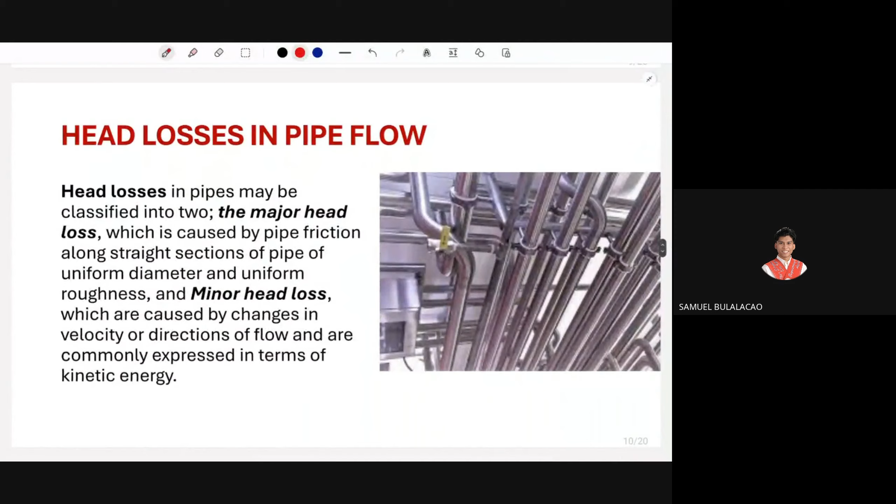Let's proceed with the head losses in pipe flow. During our discussion of hydrodynamics and Bernoulli's equation, we already discussed head losses, which is the energy at point 1 minus the head losses equivalent to the energy at point 2.

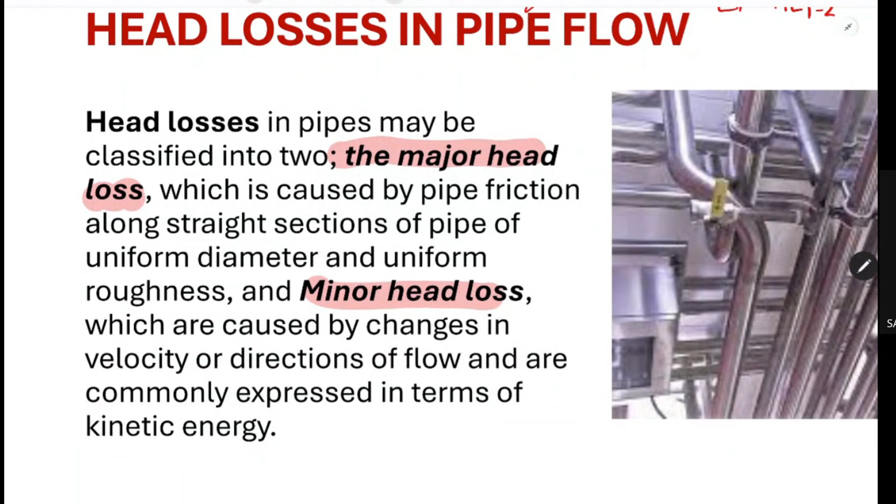So what exactly are these head losses? They're connected to what we'll discuss now. Head losses are classified into two categories: the major head loss and the minor head loss. The major head loss is the head loss caused by pipe friction along straight sections of pipe of uniform diameter and uniform roughness, basically our typical pipes that are round and straight.

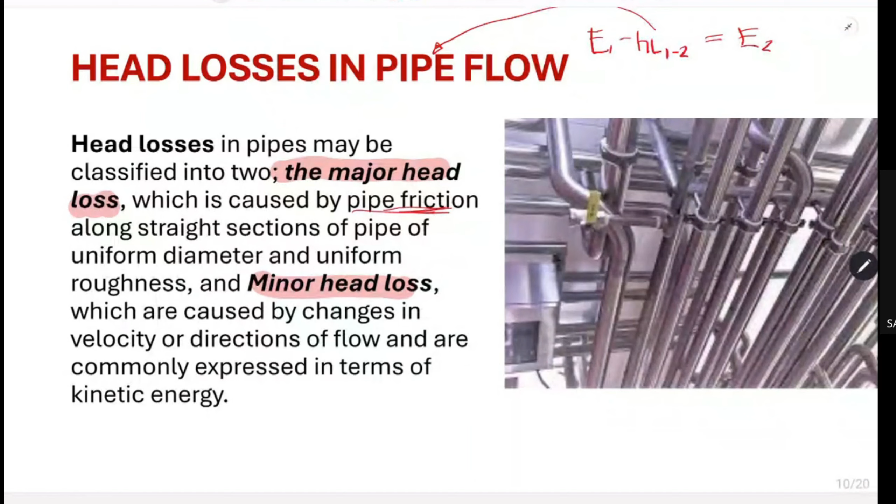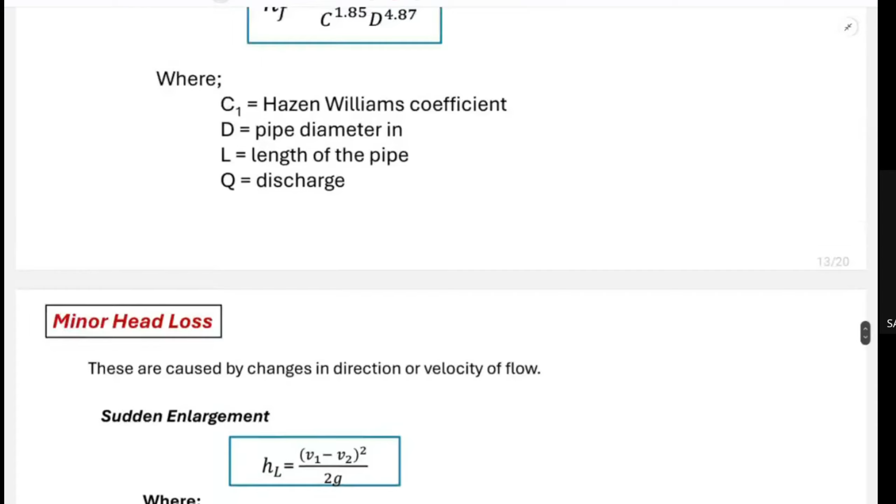First, we have the major head losses. We'll list them - major and minor. This is the pipe friction equation for major head loss. We have a total of 3 major head loss formulas that you need to memorize and familiarize yourselves with, since you can use these in everything. Don't forget them - these formulas are very important.

First, we have the Darcy-Weisbach formula. We won't introduce who made this formula or equation - we'll just acknowledge their greatness by using this equation. This is the first major head loss equation for pipe frictions. So the main equation is this.

The head loss is equivalent to the friction factor F times the length of the pipe in meters or feet, times the average or mean velocity in meters per second or English units, over the diameter of the pipe, multiplied by 2 times G. You can memorize this main equation for Darcy-Weisbach.

In this first formula, we have symbols 1, 2, 3, 4, and 5 that need to be familiarized: friction factor, length, velocity, diameter, and the gravitational acceleration, which is constant at 9.81 meters per second squared.

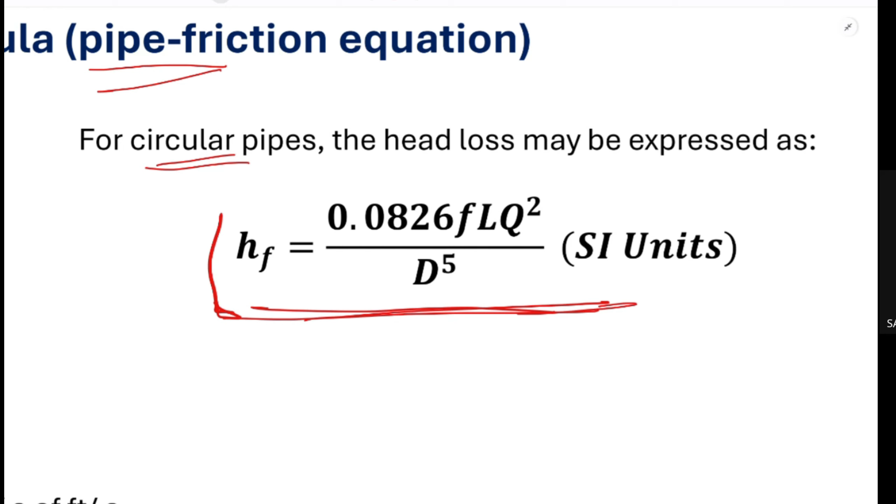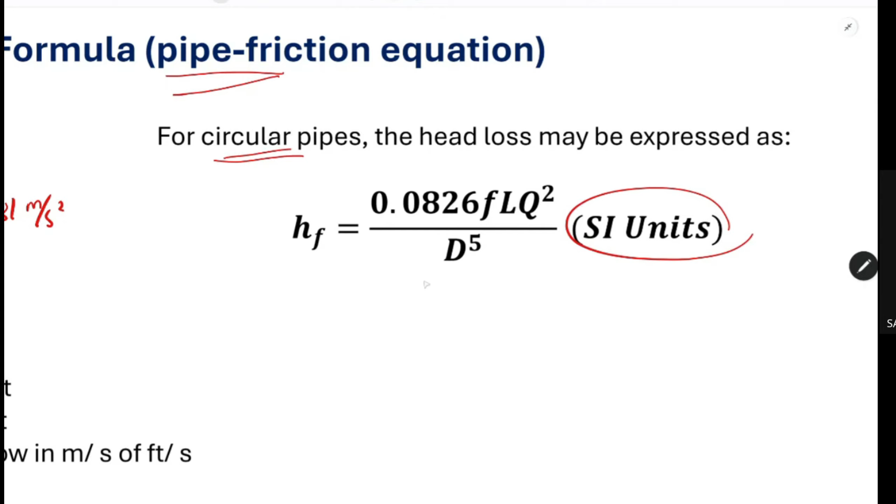We have HF equivalent to 0.0826 times the friction factor times L times the discharge squared, over the diameter raised to 5. You need to memorize this - put it in your notes or index card, or have it printed so you don't forget. The unit for this is SI units only for this equation, and most of our problems mostly use SI units.

Next, we have the Manning formula, which will be your companion for these formulas when it comes to correlations in board exams. The second major head loss is the Manning formula. This formula is best known for open channel formulas and is commonly used in pipes as well, for analyzing pipes.

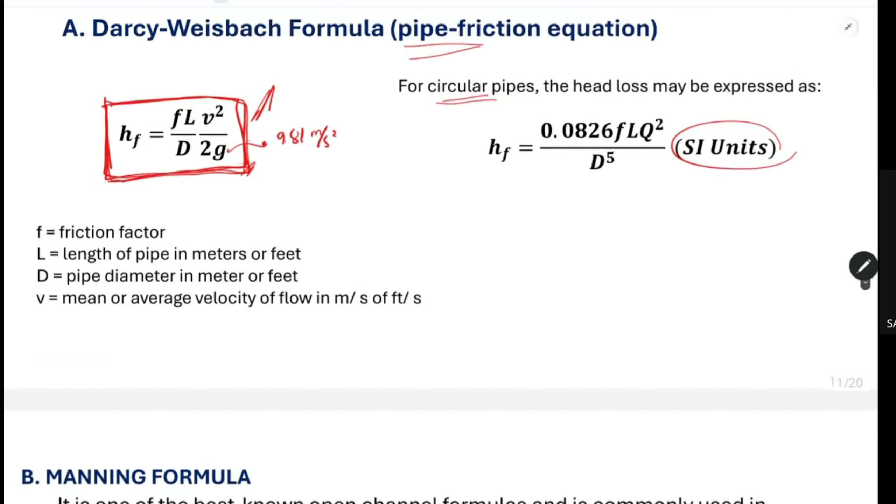For the formula, we have velocity equal to 1 over n, where n is the Manning's or roughness coefficient, which is always given. We have R, the hydraulic radius, raised to 2/3, and the slope of the energy grade line raised to 1/2, which is S. For now, just write this down so your formulas are ready.

For circular pipes, we have two versions. We have 6.35 n squared L V squared, over D raised to 4/3. And we have 10.29 n squared L times Q squared, over D raised to 16 over 3. Basically these are almost the same - the second one just expanded and converted V into Q.

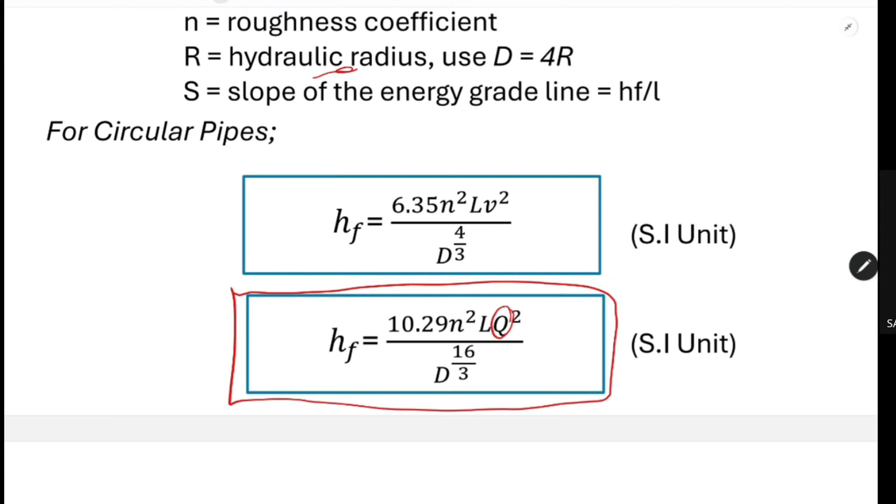Lastly, we have the Hazen-Williams formula. It is widely used in waterworks industry. These three formulas are always used when it comes to waterworks, piping systems, etc.

We have the formula for circular pipes: 10.67 times L times the discharge over the Hazen-Williams coefficient C, raised to 1.85, times D raised to 4.87. The exponents and multipliers can be confusing.

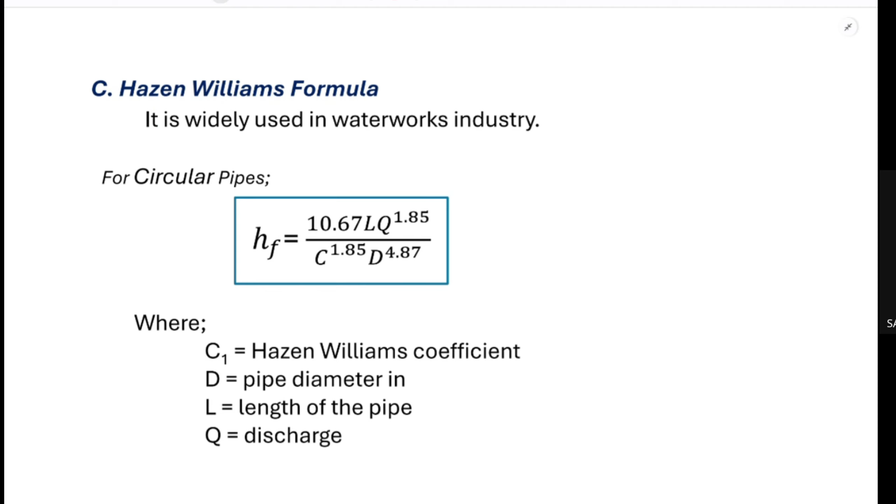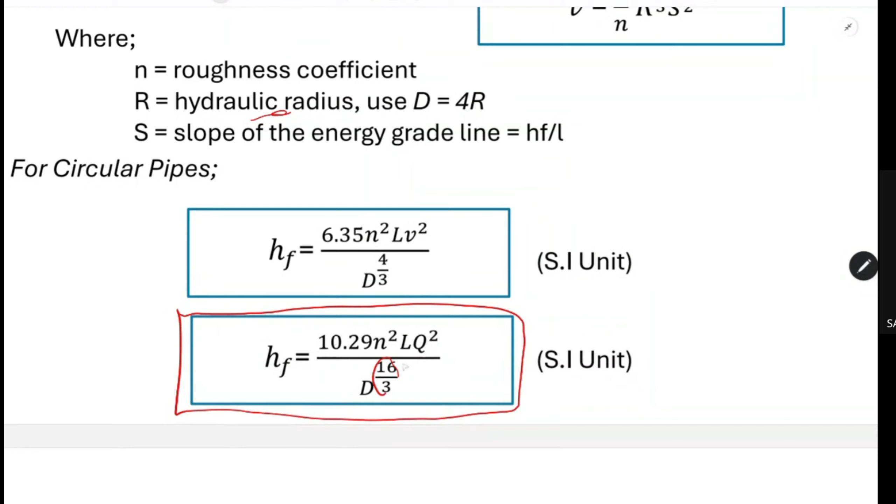So we have 0.0826 FLQ squared over D raised to 5 for Darcy-Weisbach. We have Manning's formula: 10.29 n squared LQ squared over D raised to 16 over 3. And lastly, Hazen-Williams: 10.67 LQ to the 1.85, C to the 1.85, D to the 4.87. These are similar to each other.

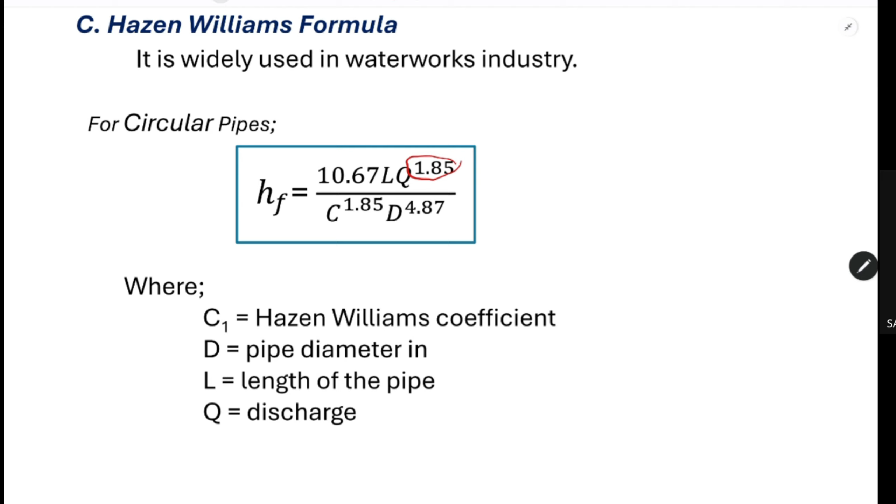Let's move on, there's also minor head loss. These are caused by changes in direction or in velocity of flow. We have sudden enlargement - when the area is small and suddenly becomes large, the velocity changes, and that change in velocity has an effect on head losses, which falls under minor head losses.

For sudden enlargement, we have HL equals V1 minus V2 - V1 being before and V2 being after - raised to 2, over 2G.

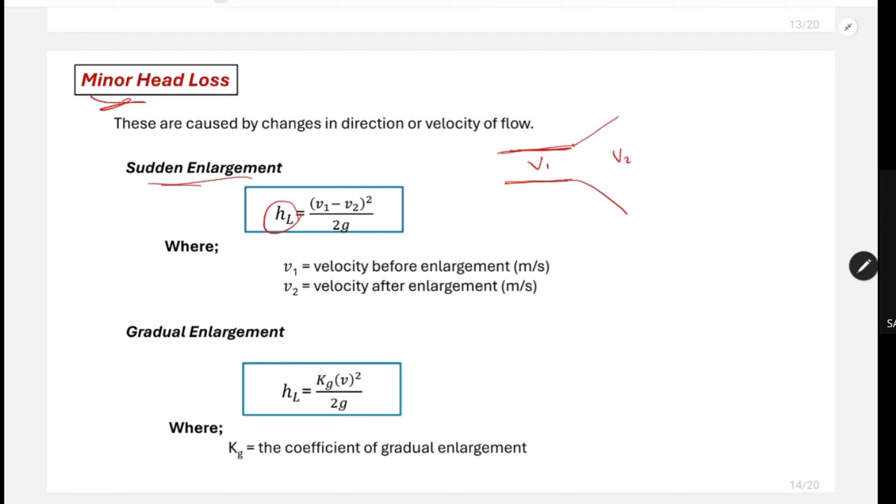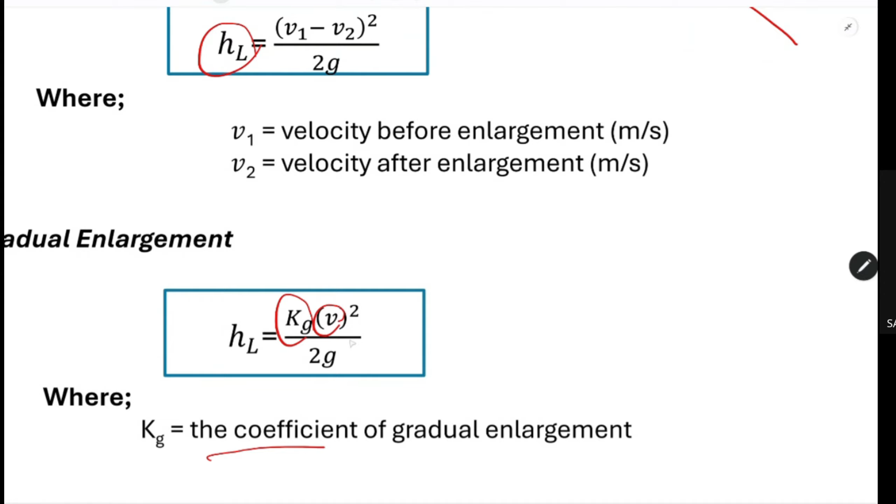For gradual enlargement, the equation becomes Kg, the coefficient for gradual enlargement, times the velocity squared over 2G.

Next, we have sudden contraction. For sudden contraction, we have HL equals Kc, which is the coefficient. What changes here is just the coefficient - Kg for gradual, and Kc for contraction.

Let's try solving problem number 1. Let's solve this one first.

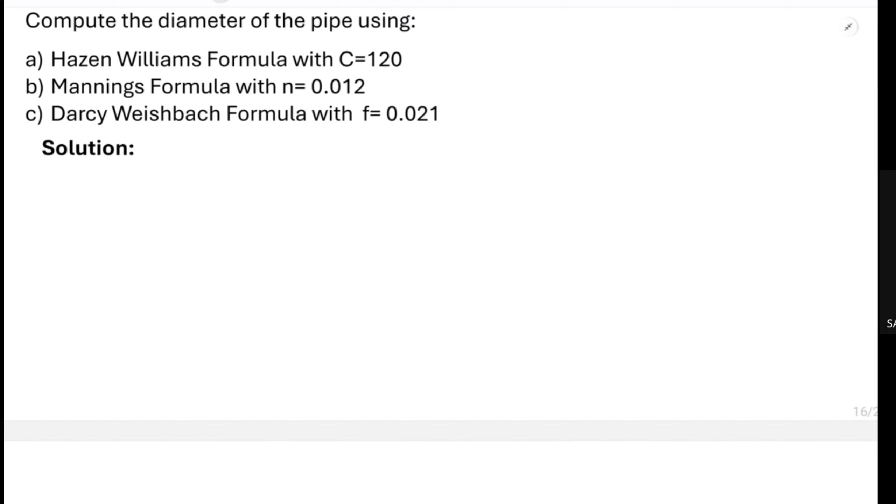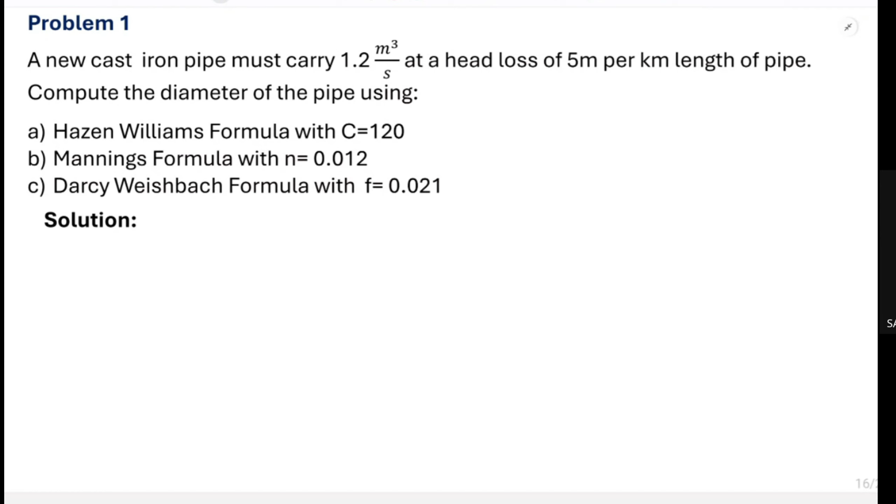Let's solve the pre-class problem. A new cast iron pipe must carry 1.2 cubic meters per second - this will be our Q - at a head loss of 5 meters per kilometer length of pipe. This will be our head loss, and per kilometer means we have 1000 meters length of pipe. Compute the diameter of the pipe using the following formulas: Hazen-Williams, Manning's, and Darcy-Weisbach, with corresponding coefficients and factors given.

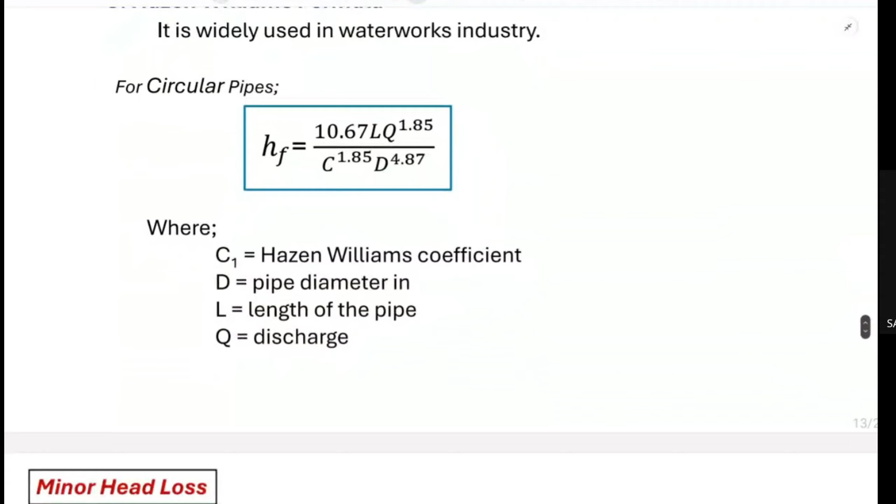Let's start with letter A. First, let's write down our equation for Hazen-Williams: 10.67, LQ to the 1.85, C to the 1.85, over D to the 4.87.

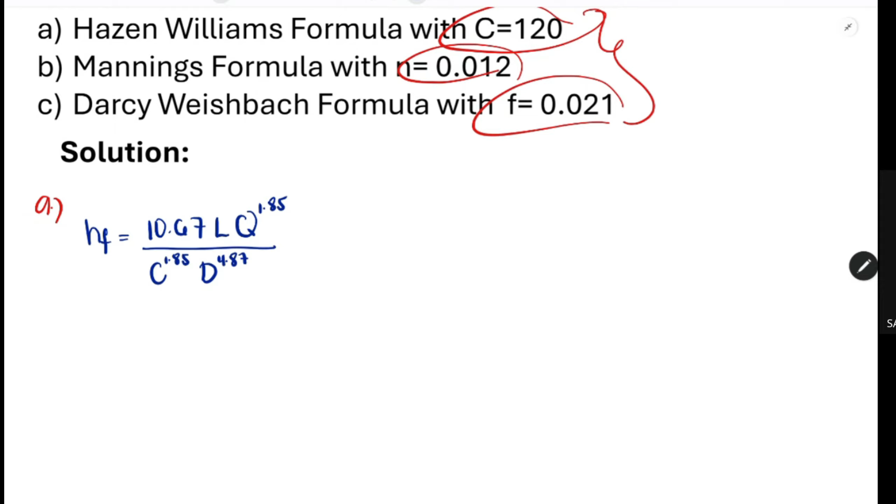So we have HF equals 10.67, L, Q to the 1.85, C to the 1.85, over diameter to the 4.87. Now that we have the equation for Hazen-Williams, what we're going to do is substitute all the givens from the problem.

For HF, we have the head loss of 5 meters - that's what we'll put as the given for head loss. That equals 10.67. The length is of course 1000 meters since we have 1 kilometer.

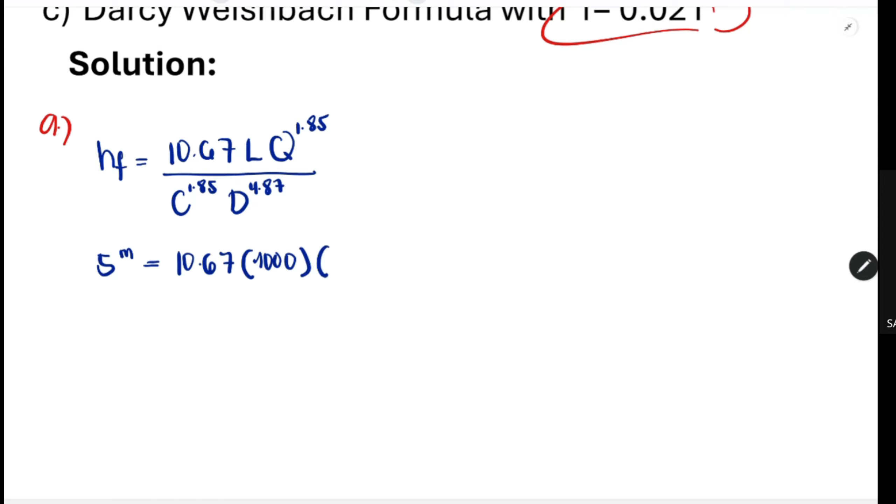For Q, we have a given of 1.2, so we'll automatically put 1.2, since the unit is cubic meters per second. Don't forget the exponent, 1.85 - most students forget the exponent, which is unfortunate. Over C, which is given as 120, also raised to the exponent 1.85. Then for D, it's unknown, raised to 4.87.

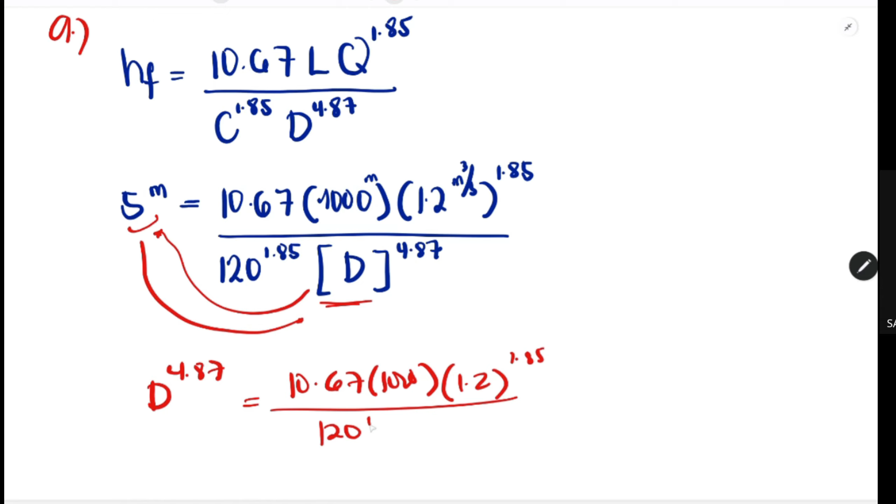So ang mangyayari, magiging D raised to 4.87. Tapos, 10.67, 1,000, 1.2, 1.85. Yan, may sagot na. Pero pagkita muna natin ito. 120, 1.85, tapos 5. So, magiging ganyan yung simplifications nyo ng equation. So, para matanggal itong exponent na to, maglagay ko ng exponent din, tapos nakalagay 4.87.

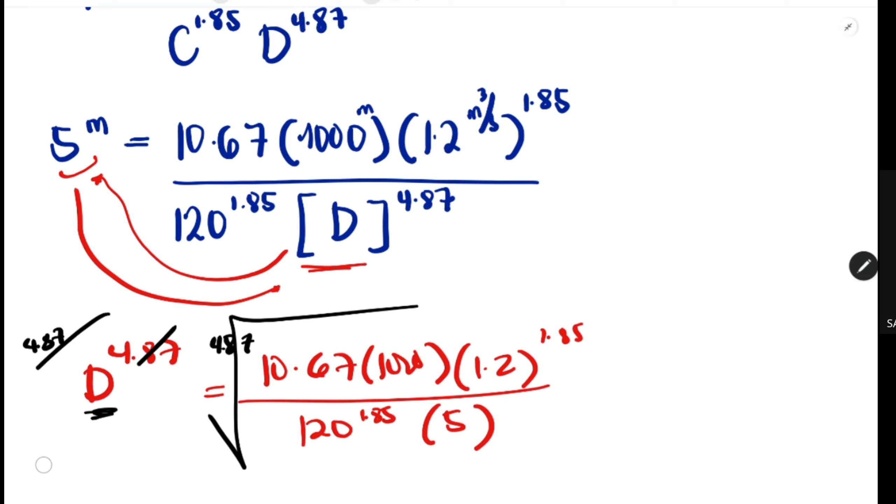Mas mabilis yung calculations kapag ganito. Maka-cancel yan, may tira D. Yan, screenshot muna nito. Erase natin. So we have the value of 0.839.

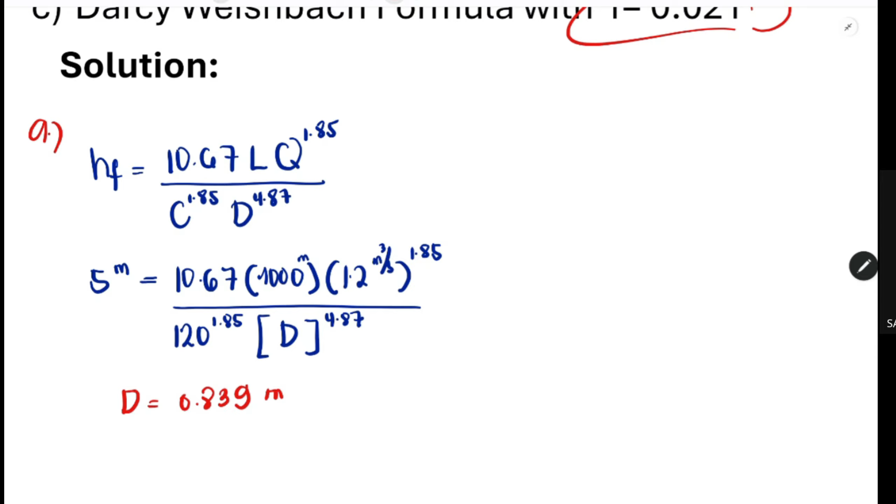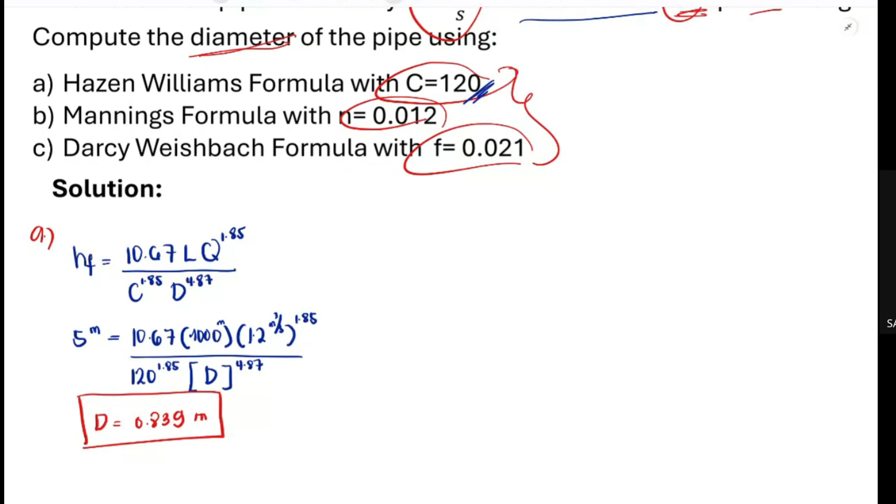In meters po yung magiging sagot natin for letter D. Yan. Letter A, we have 0.839. Answer. Screenshot for letter A.

Itong mga topic na ganito, nung lumabas sa Corel, sa board exam, matik, no? Kahit wag na kayo magsulat, calculate nyo na lang. 1 point.

Para pag nakakita kayo ng ganitong problem kasi, parang may isip nyo, may pag-asa ang mundo. Parang gano'n, diba? May experience nyo yan. May experience nyo yan. Darating din kayo dyan. Pag nakikita kayo mga ganitong problem, yan, may isip nyo, may pag-asa ang mundo. Legit.

Naririnig ba ang ulan sa background? Or hindi? Ay, nag-flex lang ko ng mic na may auto noise cancellation.

Di tayo mapipigilan ni Kristine. GG na to.

So letter B, Manning's formula.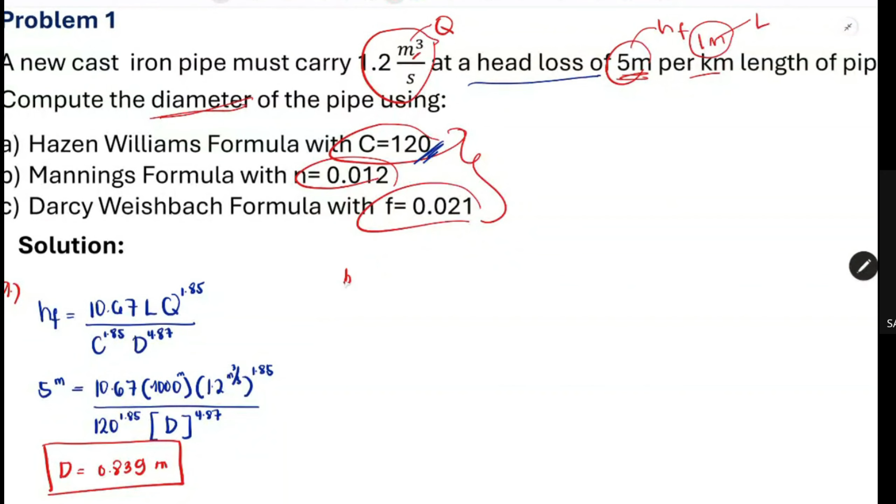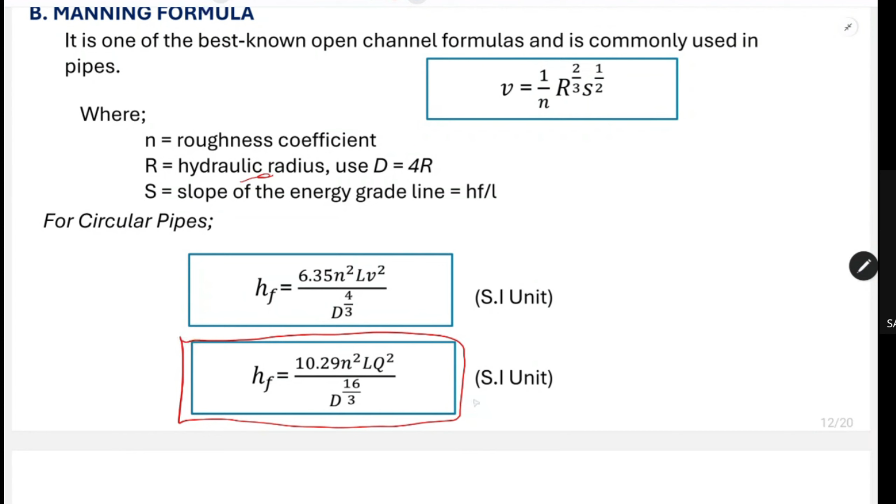So, balikan lang natin yung equation natin for Manning's. Meron tayong, pwede natin itong gamitin tatlo. Pero ang gagamitin natin is ito na lang pong isa, itong may box na red. And ito na rin. Try natin isolve yung dalawa. Basically, parehas lang po yung lalabas dyan.

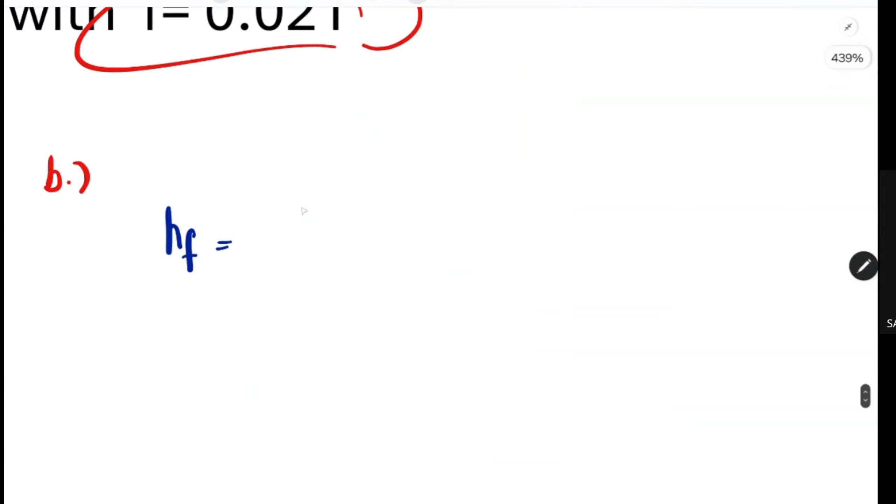So we have 10.29 n squared L Q squared over D 16 over 3. HF, multiplier 10.29, coefficient L Q squared over diameter 16 over 3. So yan. Ito yung unang equation natin.

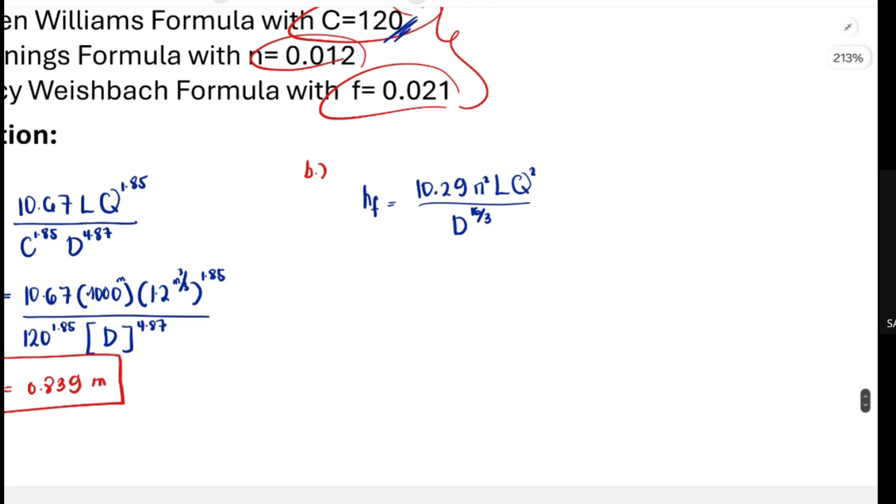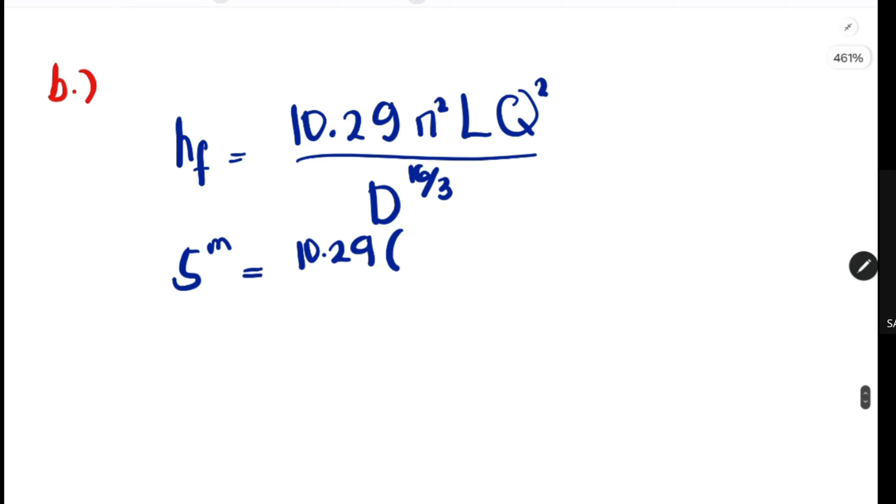Try natin i-solve. So same lang po yung gagawin nyo. Substitute the given to the equation. We have 5 meters, 10.29 times n. Ano po yung n natin? Given po yan sa problem. We have 0.012.

Of course, naka-squared po yan, no? So once na makalimutan nyo yung squared, mababago yung sagot. And then, of course, yung L natin is para silang po, 1,000. And we have the Q na 1.2. Squared ulit. And then, for the diameter, ano po yung diameter natin?

So, again, shift solve or simplify nyo na lang. So, ganito na lang. I-simplify nyo na lang para matuto na kayo mag-simplify mga ganito. Especially kapag mag-solve kayo ng diameter. Type nyo, square root of, yung square root yung may lalagyan dito na box.

Medyo makapal ang line weights. We have 16 over 3. We have 10.29, 0.012, 1,000. Huwag kayong mag-asa parate sa shift solve.

Kasi minsan yung canon, may topak yan. Ganito lang. Type nyo sa calculators nyo. So magkano po yung, or ilan po yung sagot? Ay, meron na pala eh. We have 0.8524.

852. Okay? So we have 0.852 meters.

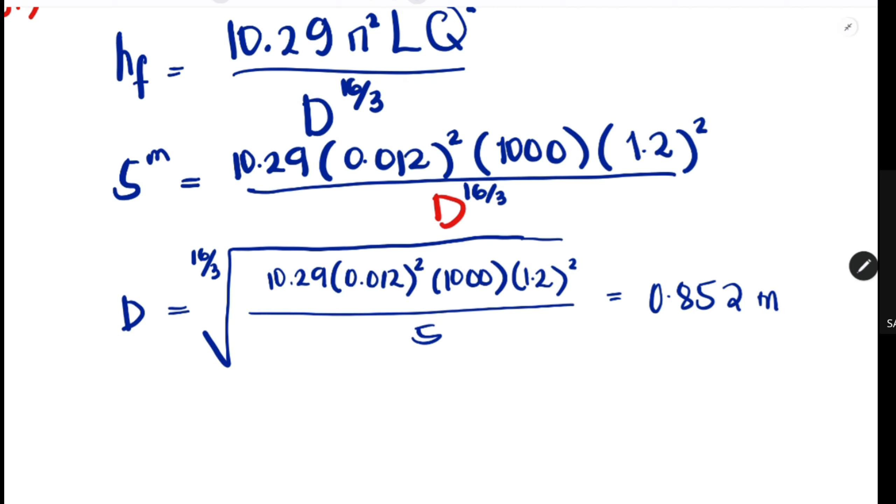Then, easy. Diba sabi ko sa inyo, mas may mga ganitong problem, mapapaano kayo, may day kayo ng thank you, Lord. Diba?

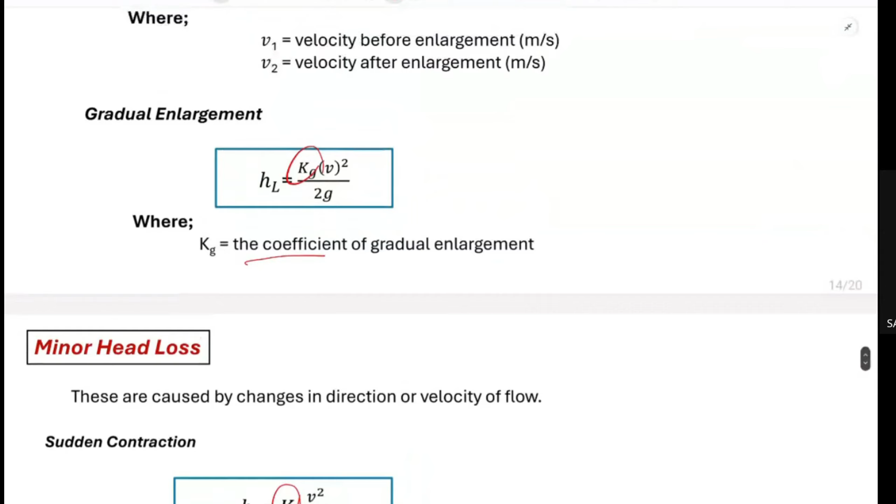So, try naman natin yung isang formula. Ito. Para lang din maipakita natin. No? Ay. Tanggal yung saksak.

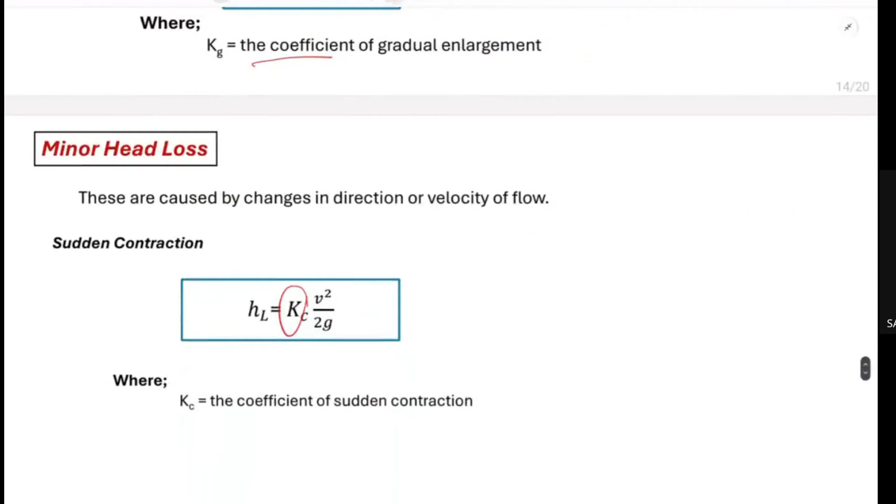Dito na lang natin sa Manning's. We have V equals 1 over N, R to the 2/3, S to the 1/2. So, in our equation, wala tayong R, wala tayong S. Meron tayong N, meron tayong velocity. Pero pwede po nating magawa ng paraan yan.

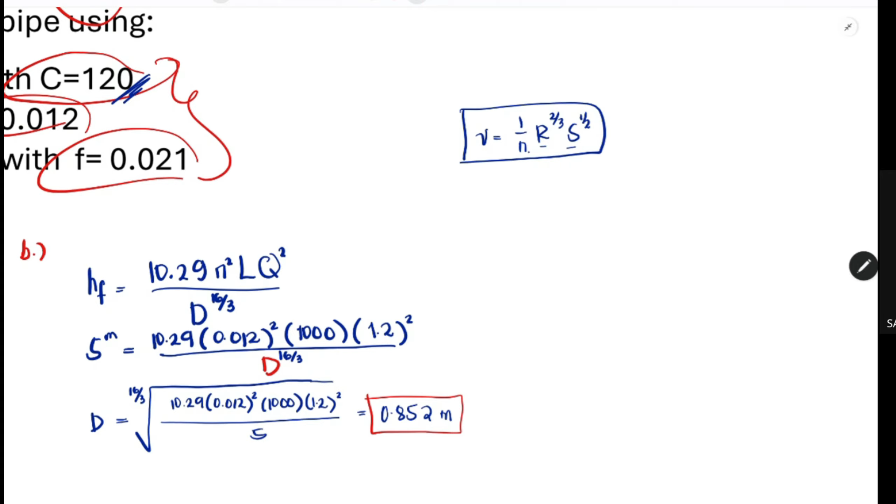Ayan, balikan lang natin yung equation natin dito sa... So, makikita nyo po, we have yung slope na S, we have HF or the head loss over the length. So, kayang-kaya natin ma-solve yan, since meron tayong head loss and then meron tayong length. But at the same time, yung R is the hydraulic radius. So, yung diameter natin is equivalent to 4R. So, pwede natin makuha yung R by D over 4.

Ano po? Ayos lang natin. So, yan. Balikan natin dito. So, for S muna, o ilagay lang muna natin dito itong equation natin. So, for V, meron tayo ulit Q over A. So, isubstitute natin dito muna. We have Q over A.

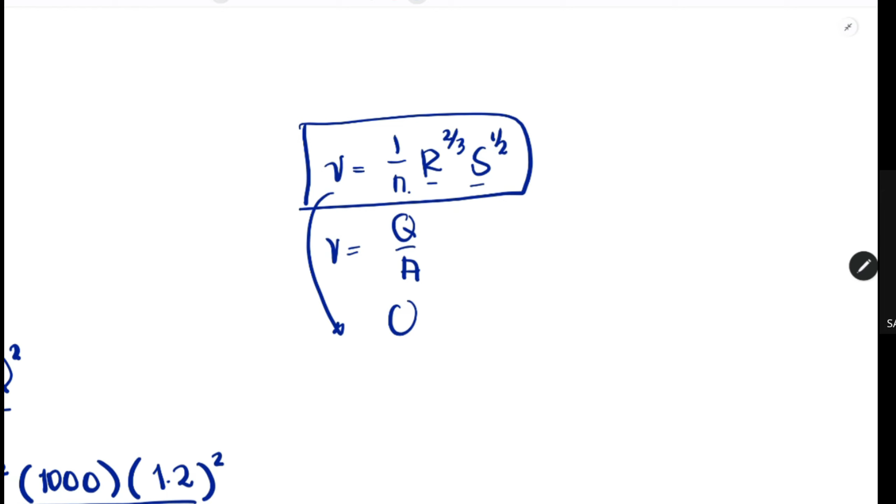We have 1 over N. For R, we have D over 4 raised to 2/3. And for S naman, we have the head loss over the length raised to 1/2. So basically, yung equation po natin na to, ito, galing lang din po yan dito.

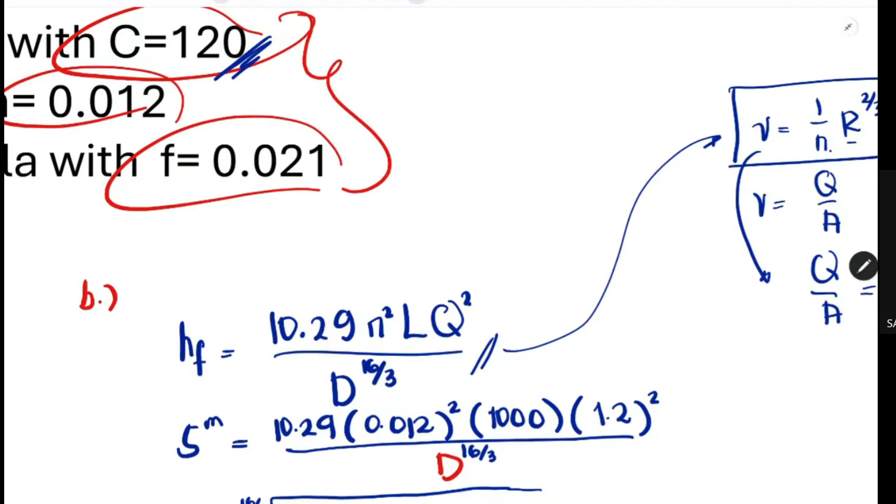Minanipulate lang, inayos, nagkaroon ng main equation na ginagamit natin for today. Pero basically, galing yan po siya dito. Lahat, no? I mean, hindi lahat, para sa Manning's.

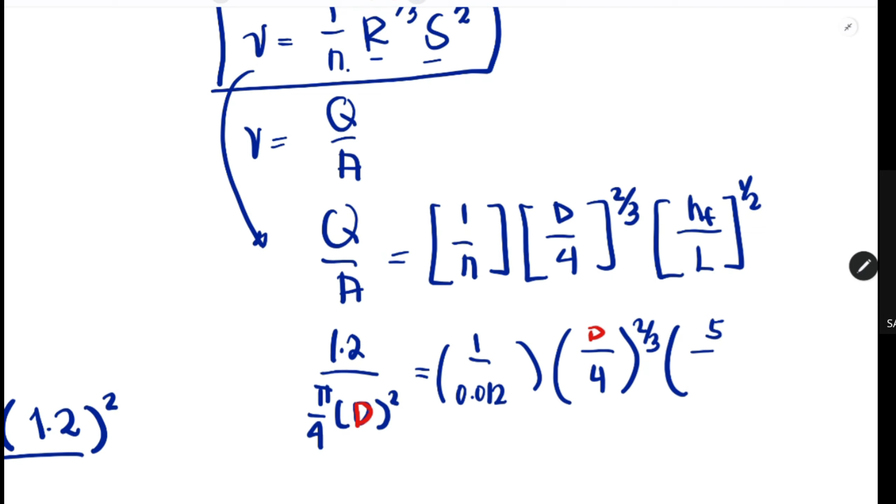So, ang gagawin natin is, of course, substitute natin to. Q, we have 1.2. And then for A, we have pi over 4 D squared. Equivalent to 1 over 0.012. And then for D, unknown. Lagay natin ng red para distinguish natin. 2/3. And of course, we have HF 5 over 1,000. Raised to 1/2.

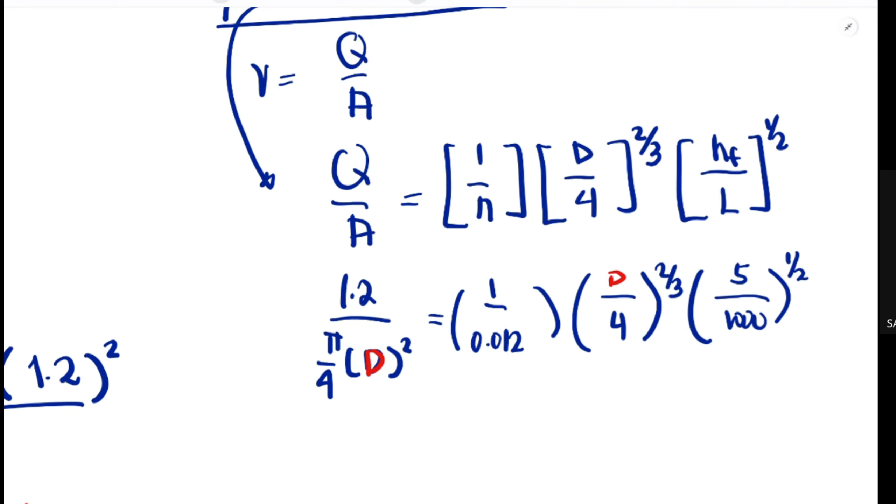So dito, pwede na kayong mag-shift solve na lang para mas mabilis. Or kung mas mapabilis sa inyo simplify, simplify nyo na lang. So, in this case, yung sagot po dyan is of course parehas lang po dito sa nakuha natin na 0.852.

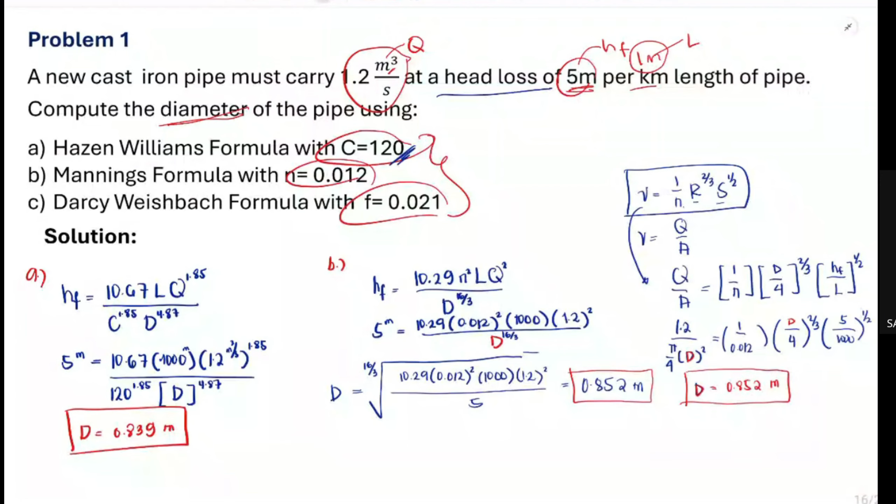And screenshot. For the last item, letter C, we have Hazen-Williams, Manning, Darcy-Weisbach - pinaghalo-halo na yun. So we have the given na...

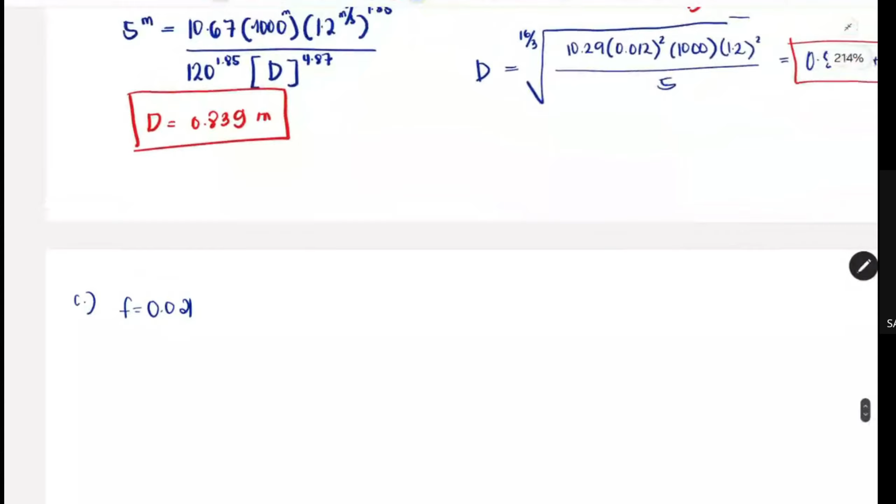0.021 for the friction factor. So for the equation natin, balikan natin ulit. We have 0.0826 FLQ squared over D raised to 5. We have HF equals 0.0826 FLQ squared over D raised to 5.

Sa ulo ko pa nga eh. Ano kasi yan ay may tongue memory. So once na sinasabi mo yung mga formula, tawag na doon tongue memory. Pero kung sinusulat mo, muscle memory. Parang... another day, another learning.

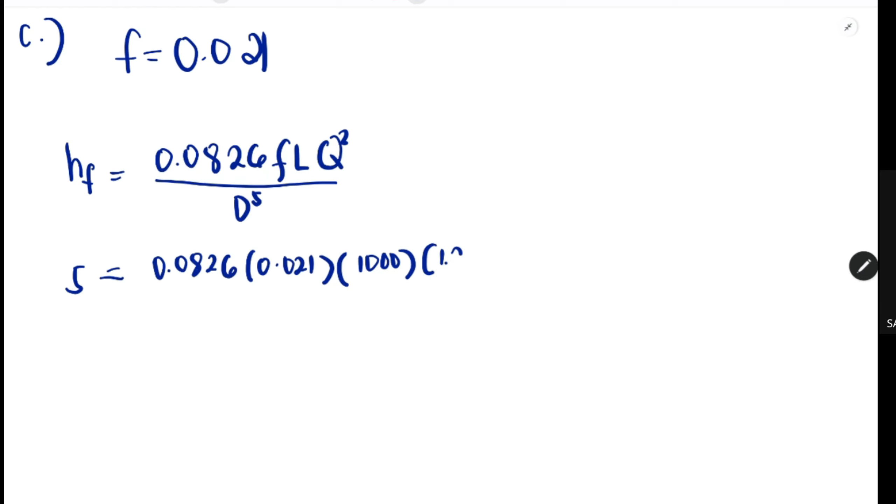0.0826 FLQ squared over D raised to 5. So wala na ditong babaguhin, no? We have the head loss 5, 0.0826, 0.021, length is 1,000, Q is 1.2 raised to 2, over D raised to 5. So ano po yung magiging diameter natin dito?

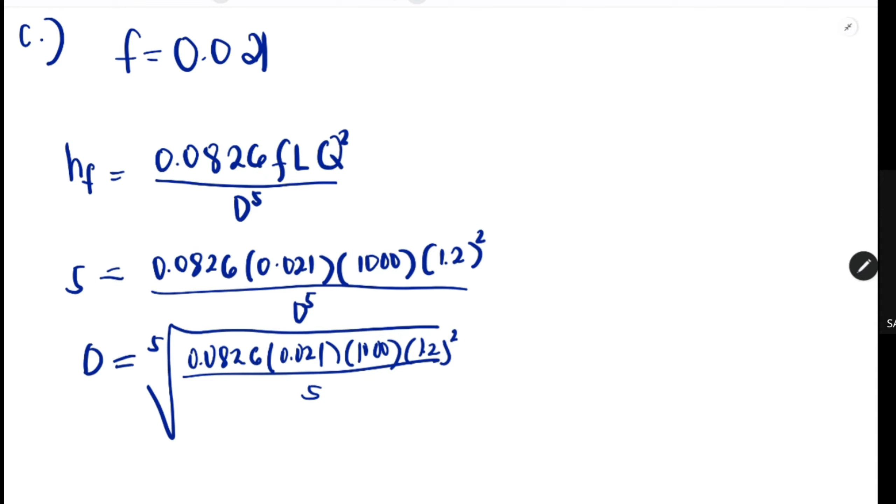O gawin nyo na lang ganito. Square root of raised to 5: 0.0826, 0.021, 1,000, 1.2 over 5. 0.87. Kindly confirm for 0.87.

Diba? Kadali lang. So, gawin naman natin yung isang equation ulit. Yung pinaka-main, we have HF equals FL, D, V squared over 2G. Basically, itong equation na to, galing lang din yan dito. Sinimplify lang, inayos. We have F 0.021, D unknown, L is 1,000, tapos 2G, we have 2 times 9.81.

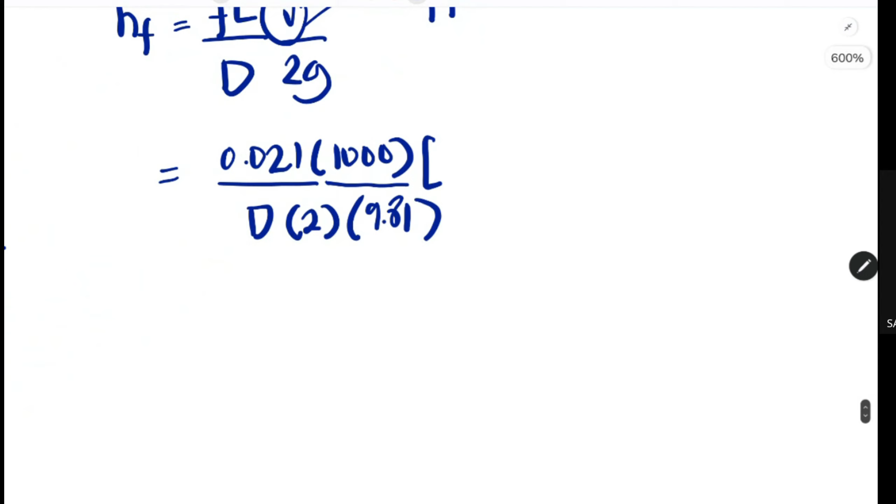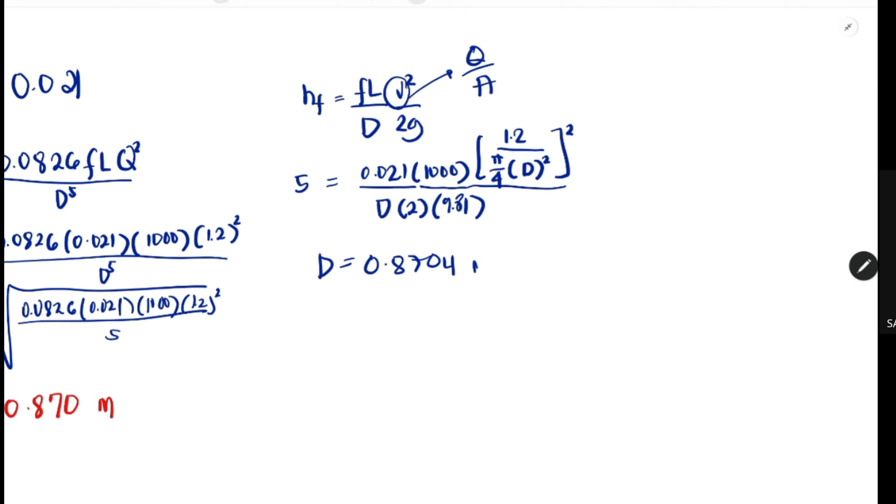And then V is of course, palitan natin ng Q over A. Wherein yung Q po natin is 1.2 over pi over 4 raised to diameter is squared. So yan, we have HF na 5. So shift solve ulit. Meron tayong D na... same lang po yung lalabas din, no? We have D na 0.8704. Answer. So, ayan. Screenshot.

Problem number 1 for the major head loss.

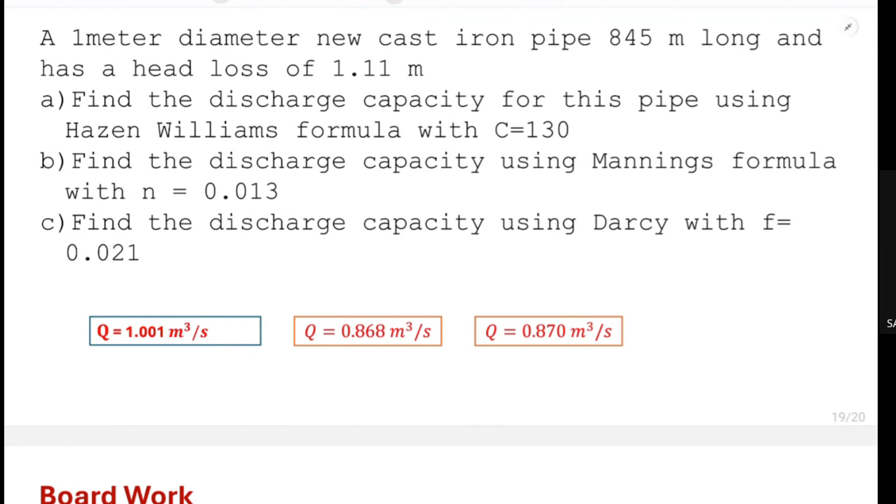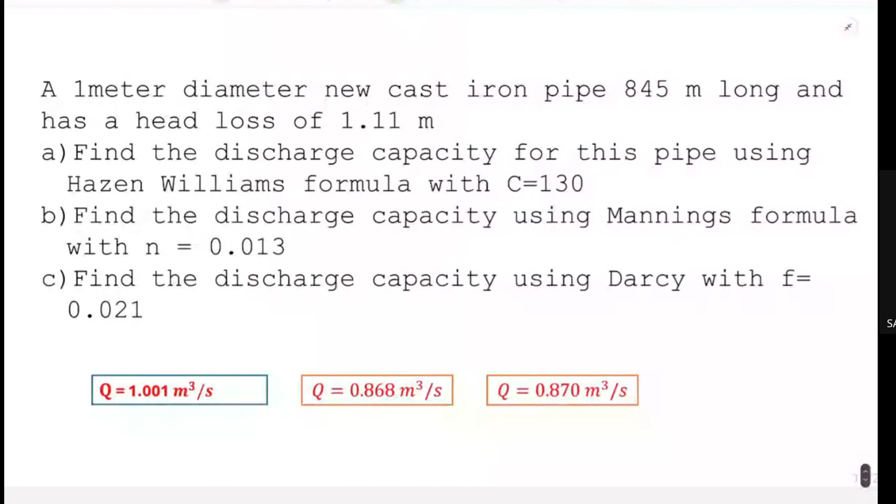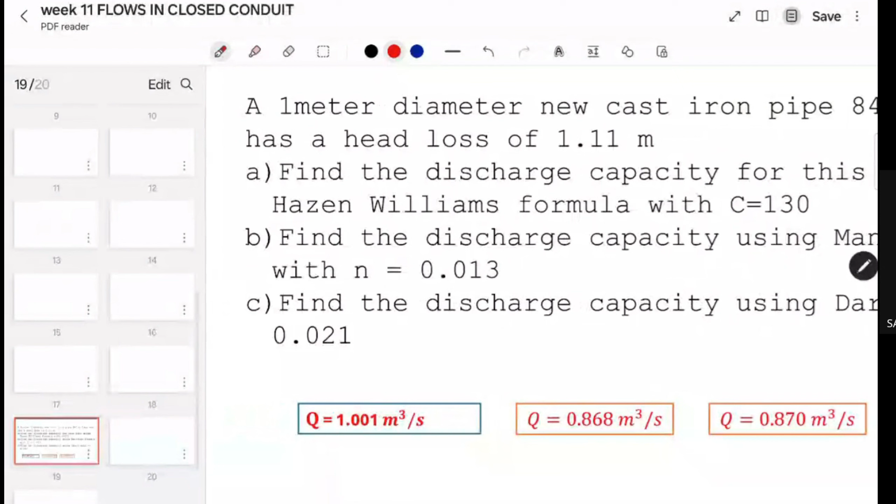Basically, same lang yung process nito eh. Bago lang po dito is yung unknown. Pero try na din natin i-solve. Isa na lang pala eh, kasi yung isa board work. Check ko muna yung problem nyo sa in-class. Baka parehas eh. Velocity. Wala. Okay. Add tayo ng paper. Ito maganda to. Need that.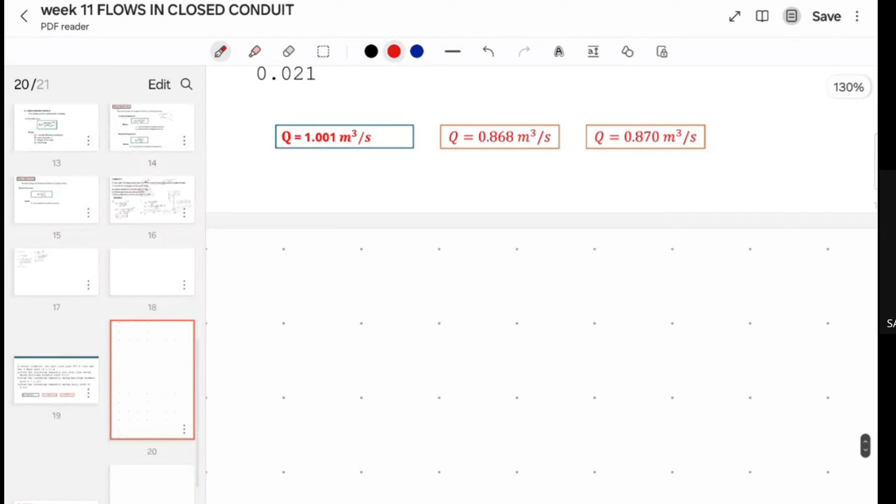So 1 meter diameter new cast iron pipe, 845 meters long - we have the length. And has a head loss of 1.11. So given na ulit yung head loss and then yung length and also the diameter of the cast iron pipe. Based on the problem, we need to find the discharge capacity for this pipe using the different equations of the major head losses.

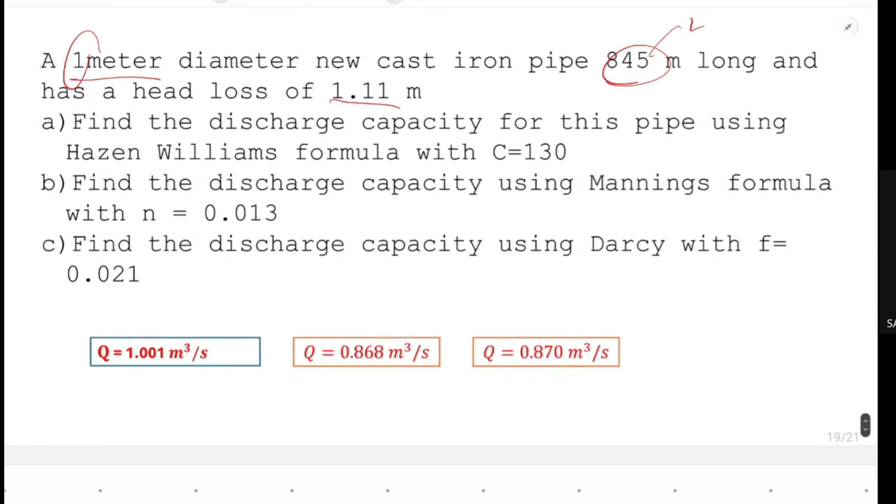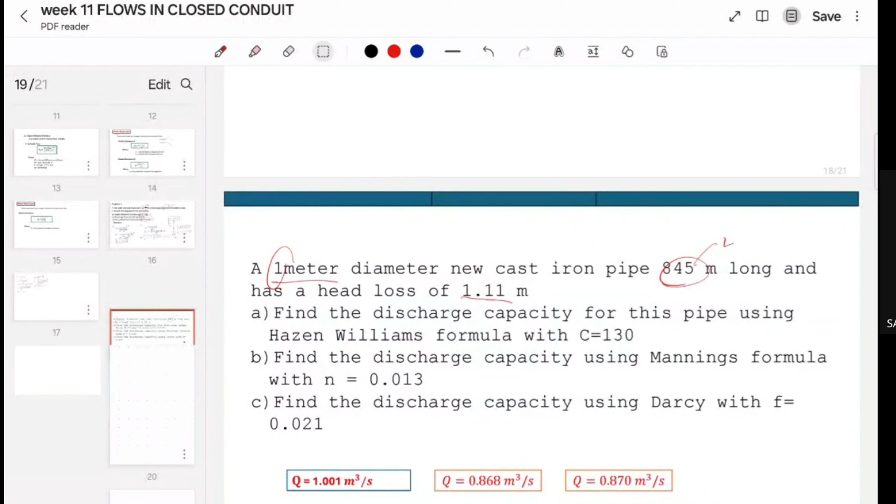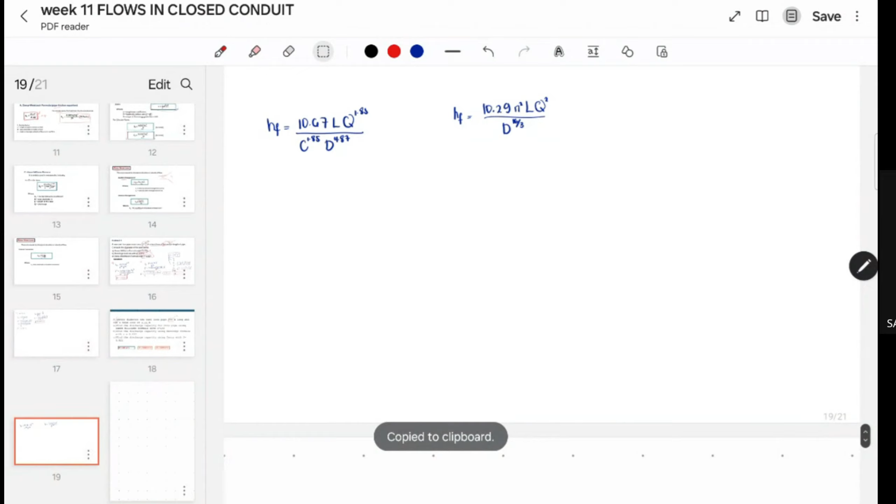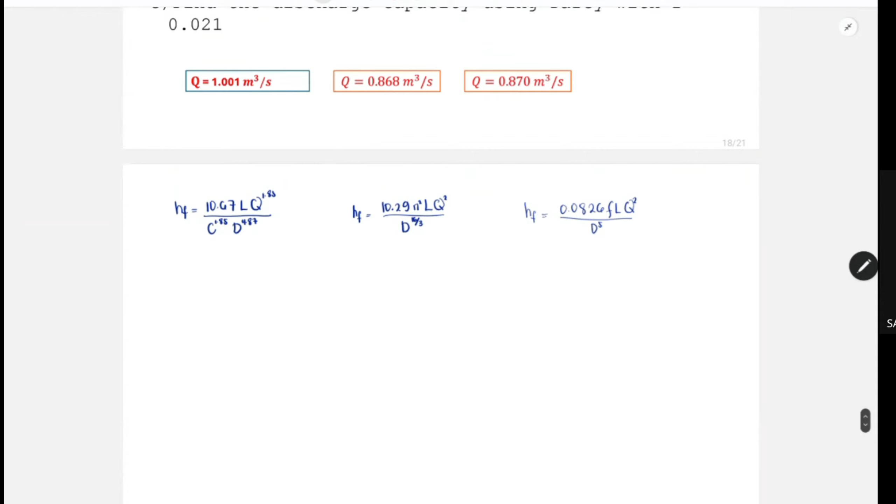So yan. Sulat lang, copy na lang natin yung mga formula natin - gagamitin. Copy. Wait lang, ayusin lang natin to. Paste. To, copy. Paste. Damay. Then last ito. Copy and then paste. So ito po yung gagamitin natin yung mga equation for this problem.

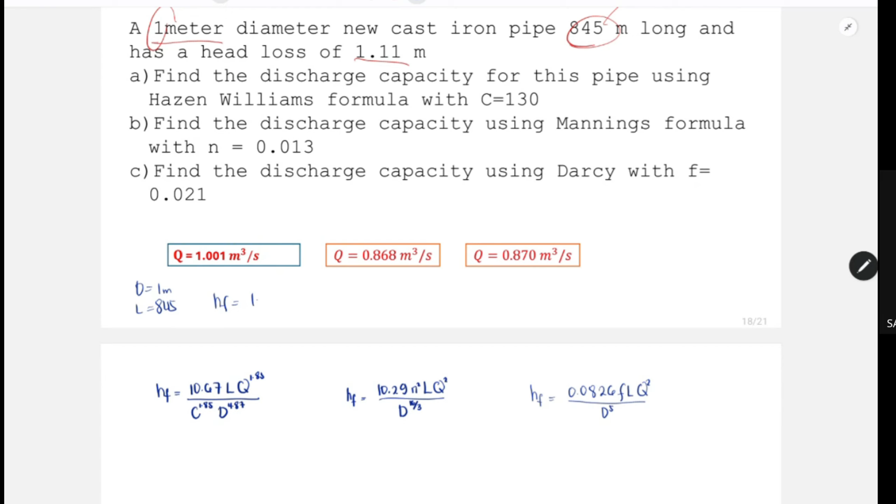So first, Hazen-Williams ulit, we have the C, 130. So substitute lang po natin yung mga givens natin dito, no? So we have the diameter, 1 meter, length 845, and then the head loss na 1.11. So for letter A, we have 1.11, 10.67, 1.11, 10.67, 845, Q unknown, raised to 1.85, and then the C is 130.

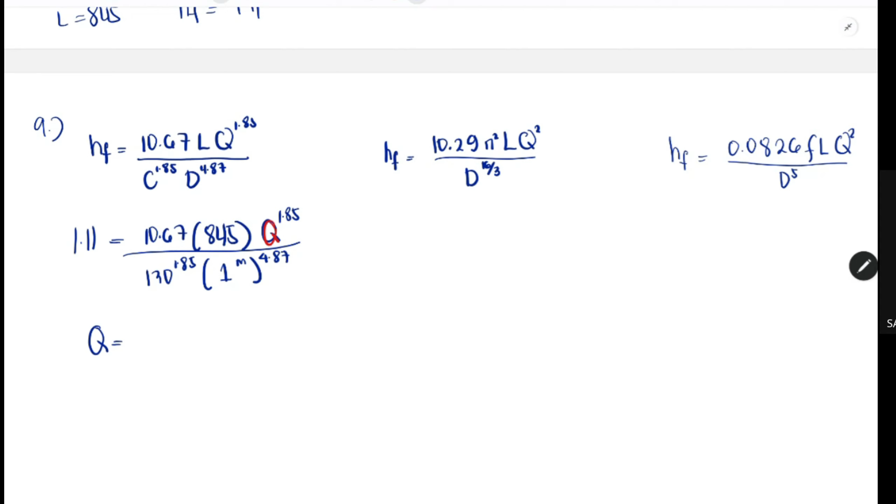Tama? Ito. And then raised to 1.85 ulit. And then 1 meter. Ayan. 4.87. So for the Q, isolve nyo na. Tapos comment nyo na lang po yung answer.

So ilalagay na lang natin dito yung equation. Sulat ko na yung mga equation, 1.11, 10.29, N natin. So basically, ang gagawin nyo na lang is isosolve na lang po. 0.013 squared, 845, Q unknown squared over 1, 16 over 3.

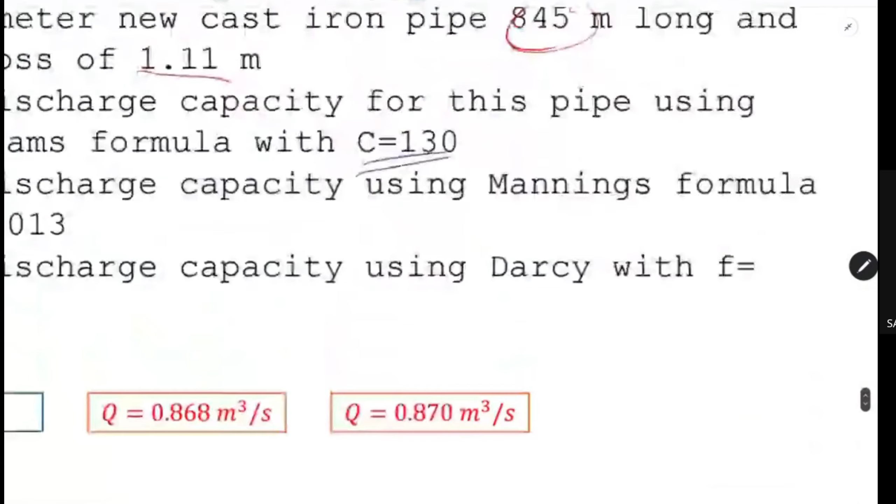And then 1.11, 0.0826. F is 0.021. L is 845. Q is unknown. Squared divided by 1 raised to 5. So yan. So makakuha kayo ng tatlong Q.

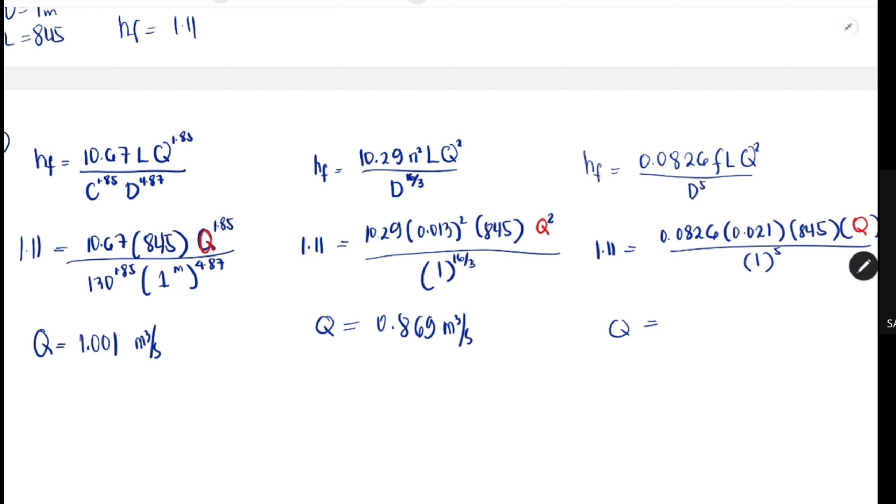So yan. Answers are, first we have 1.001 cubic meter per second. Next is 0.869 or 868. Lastly, we have 70.

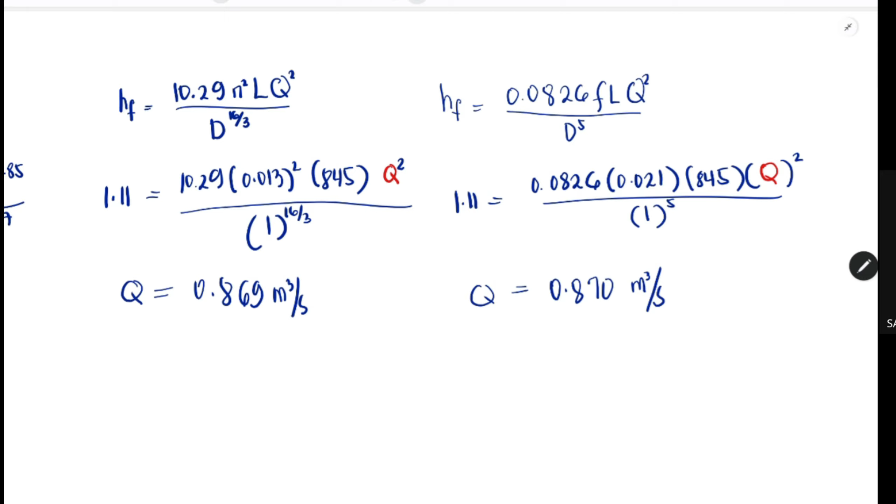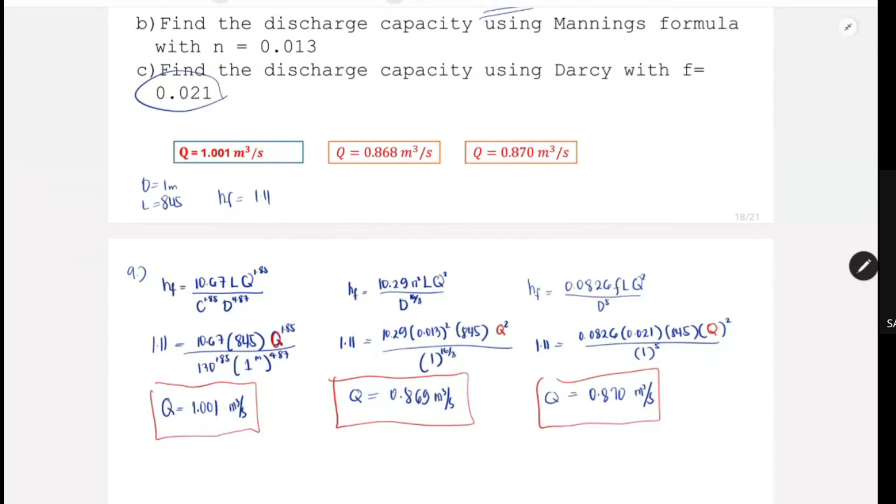So, di ba? May pag-asa ang mundo. Oh. So, kung na-solve nyo to, may pag-asa ang mundo. The word is healing. So, ayan, parehas yung sagot na nakuha natin. May sagot pala dito eh. 1.001, 0.868, 0.870. Screenshot.